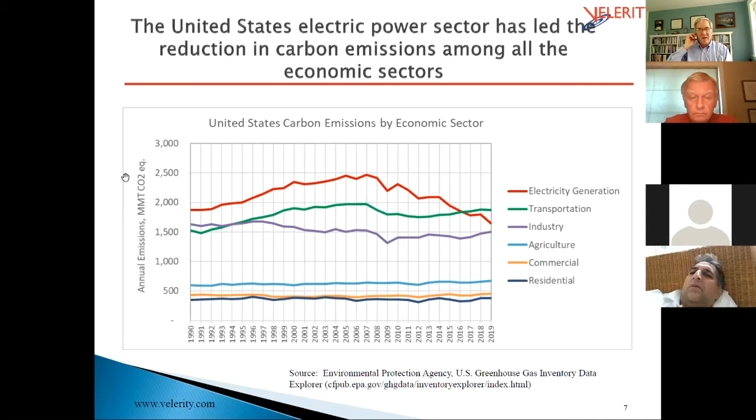We can see in the different sectors, the red line at the top of this chart is the emissions associated with electric power production in the United States. We can see a peak around 2006, 2007, with the Great Recession then beginning a decline. The electric power industry has really led our economy in terms of carbon reduction. We can see why the focus is shifting to other sectors, but it's also important to recognize and understand what's been driving this reduction.

This chart looks a little confusing perhaps, but every year we produce billions of kilowatt hours in the United States, shown on the vertical axis on the left side. We also have a black line moving through the chart, which is the Henry Hub price for natural gas. We can see that natural gas was up around $9 per MMBTU in 2008, and then it dropped rather drastically with the Great Recession and kept a fairly low profile, continuing to decline from 2009 to now.

The large reason for the decline in natural gas prices has been the fracking industry, which resulted in a deluge of natural gas on the market at volumes and prices that really drove it down. Right now natural gas is perhaps around $2.60 per MMBTU, maybe a little higher. There's been some firming in that market, but we can also see something else that has happened in this transition.

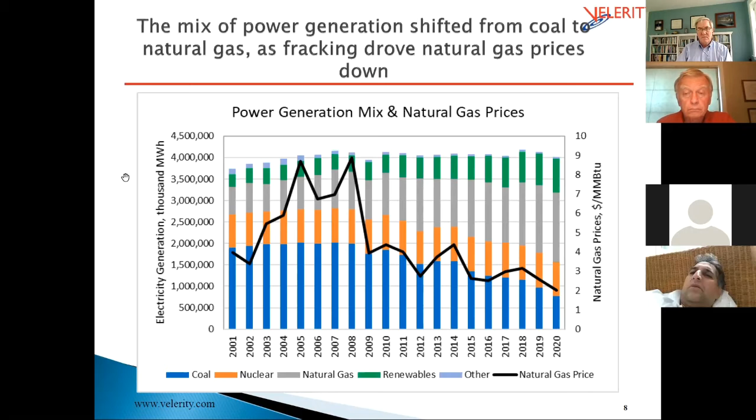What are the factors driving the interest in generating power with hydrogen? The first is the increasing pressure to accelerate power grid decarbonization. Efforts are going to continue to push carbon out of the power system.

This is happening globally, and in Europe perhaps a little more purposefully than in the United States at this point, as power generators see the risk of their assets being stranded, especially with the prospects of putting new power systems in place. We are seeing coal plants canceled around the world in terms of plans to finance and build them, but we're also seeing the beginnings of that effort on the natural gas sector, so something else is going to be needed there.

We also see increasing renewable energy creating challenges for grid stability and calls for dispatchable fuel-based energy solutions. The storage capabilities are significant in terms of lithium ion, but the scale opportunity and longer duration beyond half a day is very challenging economically for lithium ion batteries.

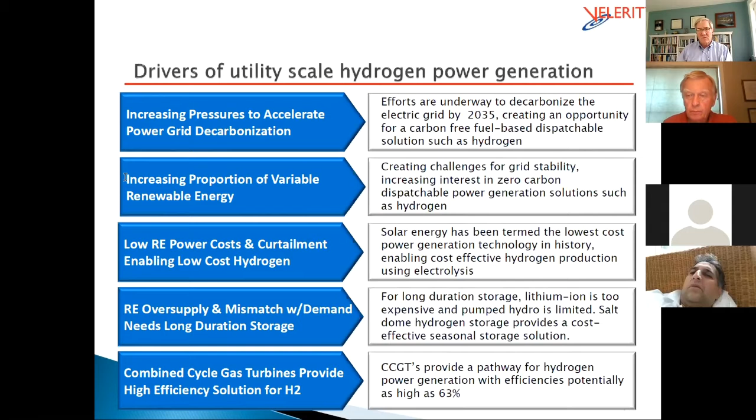It's interesting that combined cycle gas turbines can have efficiencies as high as 63%. There are some modifications with turbines running on hydrogen, so I don't know exactly how high the efficiency can go with hydrogen—I think it's close, but it needs to be tested and evaluated. This is the competition for fuel cells trying to achieve these kinds of efficiencies, which some of them can, and we have some data on that back in the presentation.

The use cases we're seeing, when we look specifically at actual projects, we're going to be talking about 12 specific projects in this presentation. There's no rhyme or reason for inclusion or exclusion—these are projects that either have already been built or are in advanced planning stages.

What we've seen emerge is really the first three approaches. The fourth is kind of a next stage of development. But most of the projects, half of the ones we see, are capturing excess hydrogen from industrial processes, and of the 6 projects identified doing that, 5 are taking hydrogen from chlor-alkali plants.

Chlorine is a major industrial gas, and its production is done with chlor-alkali, which are big electrolyzers that produce hydrogen as an output. For example, one industrial gas company in New York State takes hydrogen from a chlor-alkali plant in Niagara Falls, liquefies it, and sells it as an industrial gas. But we also have cases where this hydrogen is turned into electricity and used to feed power to the chlor-alkali plant itself, an in-the-fence power generation application.

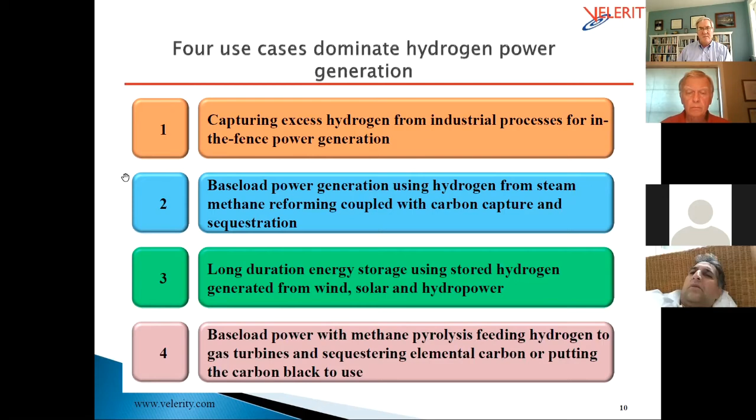The 12 plants that we'll be speaking about today are located around the world. Of course, nearly half of them are in Korea. You can see there are 4 in Europe, 1 in the United States, 2 in Australia. There's also 1 plant of note in China as well.

As I mentioned, 6 of these projects are using byproduct hydrogen, and the total size of those projects is about 72 megawatts. The total of these projects, as you can see, is 3,300 megawatts. So the byproduct hydrogen projects tend to be smaller on average, 10 or 11 megawatts in size.

The renewable energy and storage, that's a lion's share. 3 projects, 1,800 megawatts, very, very large projects. We're also seeing the SMR plus CCS, steam methane reforming plus carbon capture and storage or sequestration, fairly large projects as well, roughly 650, 700 megawatts per project.

We have 1 project in here which we just don't have information on, but it is important to have it in. I think this one is in China, and the information is fairly unavailable on that project.

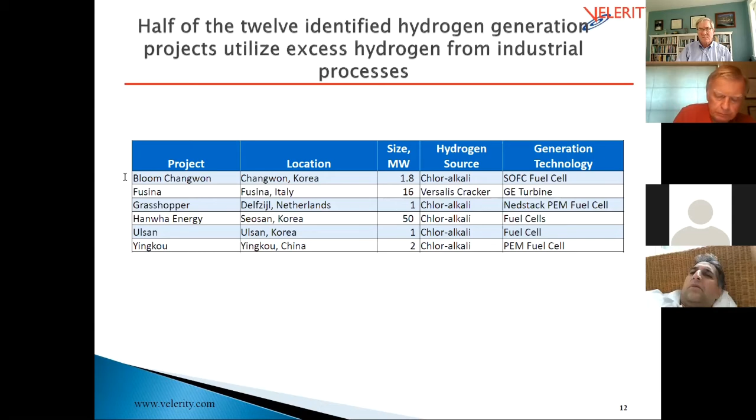Most of these are called 'in the fence' because the electricity just goes right back to the industrial customer. It doesn't go out to the grid. That's not to say it doesn't in some cases, but a kilowatt hour saved is a good idea. And why buy from the utility if you can produce it yourself as well? So that's what we see.

The very basic information here shows 27 tons a day of hydrogen, $1 a kilogram to buy that hydrogen from the industrial facility. You can see the production of kilowatt hours per year from the fuel cell, and a sale price of the electricity at 10 cents back to the industrial customer. It's about a 10 megawatt fuel cell in this illustrative model. Fuel cell efficiency at about 50%, and I recognize there are numbers that bounce around that 50%.

So for a $20 million investment and an 8% discount rate, you can see that it's a slightly positive NPV. Just to give you a sense of what it takes to get this kind of project moving in terms of the cost of the hydrogen and the cost of the electricity.

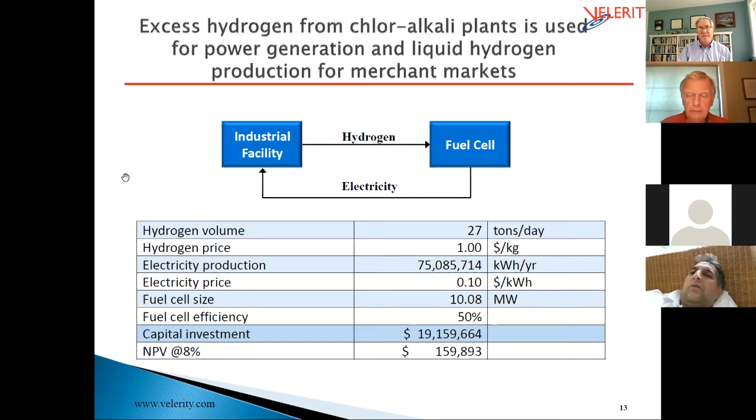The projects for the renewable energy - the Intermountain project is one that has gained a lot of press and recognition. There's also two projects in Australia. The Port Lincoln project, you can see, is quite a bit smaller. In fact, it's almost a test case. It includes a 10 megawatt turbine and a 5 megawatt fuel cell, so sort of a combo play.

The Project NEO project in Australia, that's a very large project, 1,000 megawatt. And they mentioned using fuel cells, and I just think that's something they're going to find out is not the way to go as they move forward, and they'll probably shift to a turbine strategy.

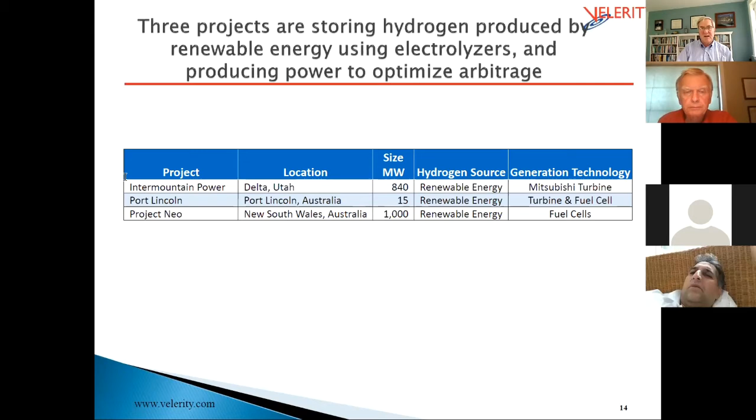The economics on these projects are very challenging, and there are a lot of pieces, and all the pieces have to not only work well together, but there has to be a Herculean effort to get the efficiencies up of each step in the process.

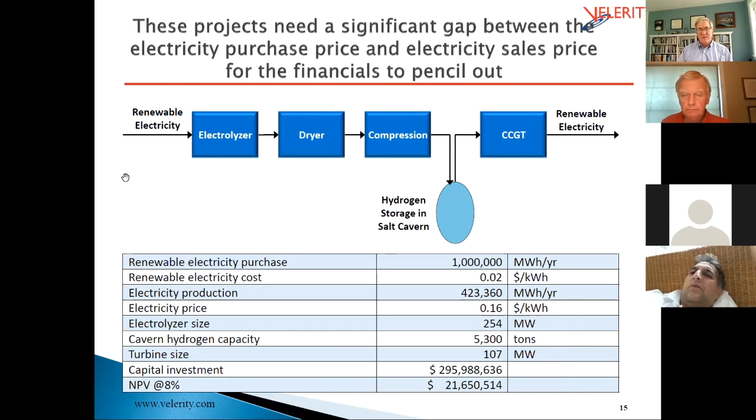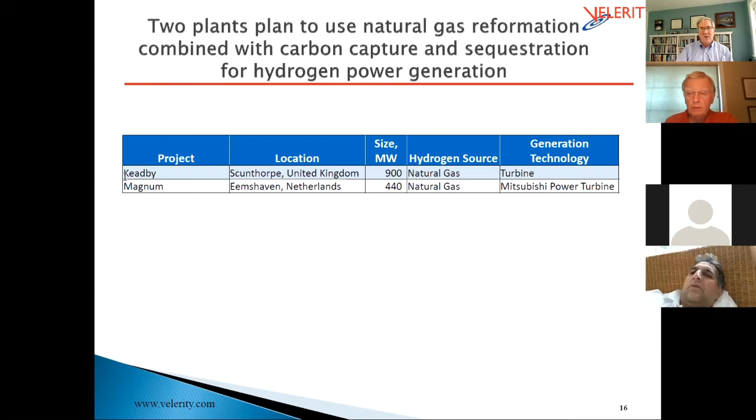We're going to go over just a few of the technologies, and then we'll open it up for questions.

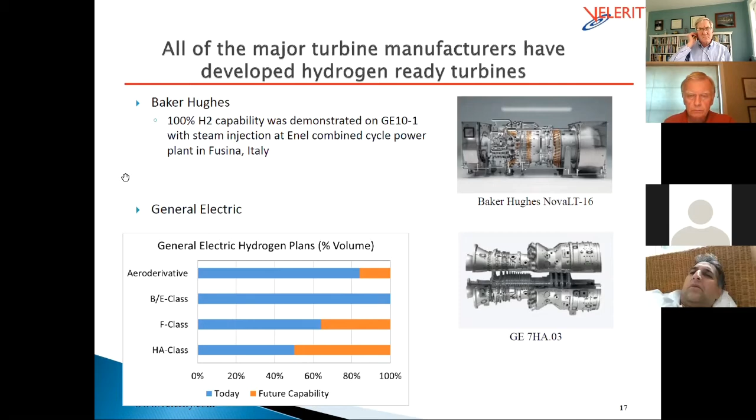Now, I also want to point out that it's not as easy just to run a turbine on natural gas and then to just say, well, we're going to switch to hydrogen. Easily said, not easily done. And there are several reasons for that.

The Wobbe index was brought up last week, and the truth is that hydrogen has some characteristics—it has extremely high flame speed. If you put hydrogen in another fuel and burn that fuel with hydrogen in it, you actually end up getting a more efficient burn, a higher burn percentage of the fuel—it really helps in the combustion. But the flame speed is such that if you have a certain nozzle design and the fuel is entering the chamber at a certain speed, you have to change that design because hydrogen is just going to flame right back to the core nozzle, as it were.

I am certainly not an expert in this field, but that nozzle design is one aspect because of the high flame speed. Now, the other aspect I want to point out is that if you just burn hydrogen like you're burning natural gas, you will get a higher amount of NOx emissions associated with this combustion. And that fact is not lost on the technology companies that are embedded or invested in these turbines.

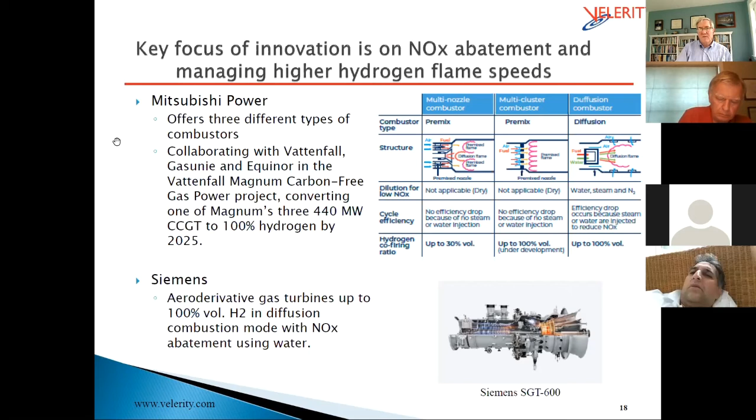And last year, they also introduced a solid oxide electrolyzer. I don't know if you call it an SOFC electrolyzer. I think they do, but that doesn't seem to make sense to me. So they've decided to offer pure hydrogen fuel cells as well as electrolyzers to produce hydrogen as well. And they are one of the players in the projects that I identified. They're putting a lot of projects out there which run on landfill gas and run on natural gas, but they have a few, two in fact, that run on pure hydrogen. One's 100 kW and another is 1.8 megawatts. And I think they're both in Korea, where a lot of this activity is taking place.

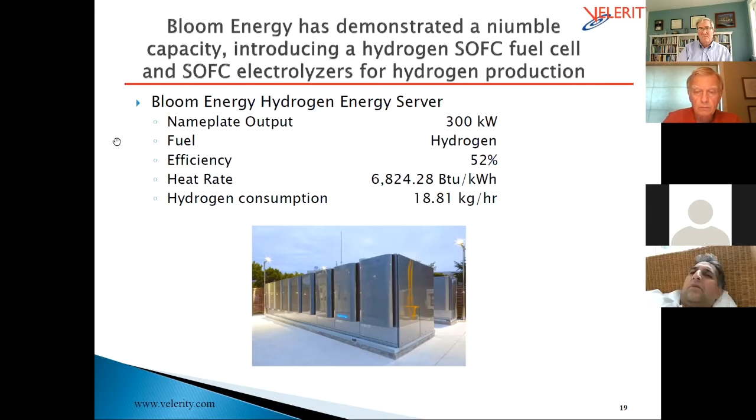So ready for question and answer.

So hi, Brad, it's Rick. Hi, Rick. How are you today? We have a question about the typical costs of cleaning up hydrogen from chloralkali for fuel cell use.

I think that answer may be different depending on whether you're talking about a PEM fuel cell or a solid oxide fuel cell, but do you have any feel for what it takes to clean up the hydrogen? No, I don't have an answer for that. I suspect that they use, because it's a higher volume activity, they probably use the pressure swing adsorption approach to that in order to achieve what they're looking for. And then it's a question of what the application is, certainly going forward.